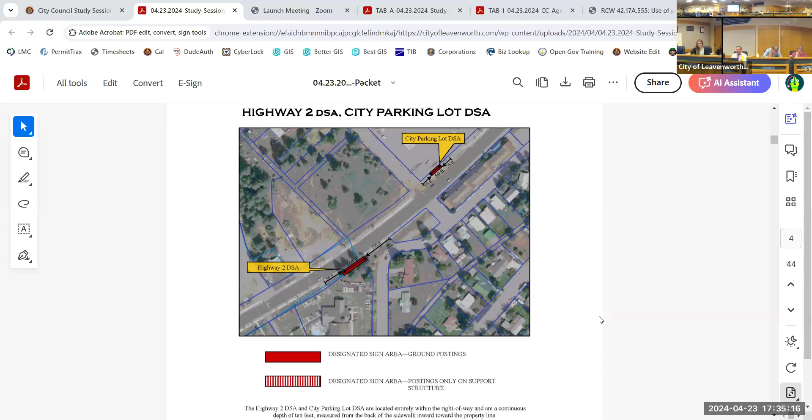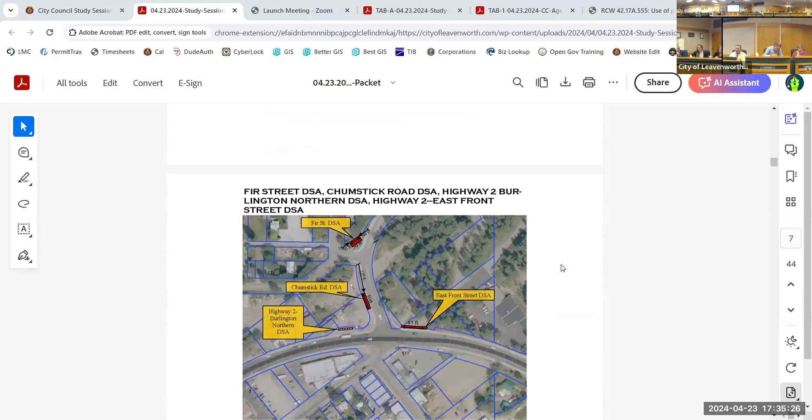Council asked staff to review alternate designated sign areas along Highway 2 where political election signs and other signs defined in the DSA portion of the code could be placed. So in your packet, you have the existing DSA section of the code, as well as some suggested areas and locations that could be created as designated sign areas. I'm going to go through this presentation, but then our city attorney is going to share some new information that I was not privy to before I prepared this.

So what we did was staff looked at areas around town that were city-owned property, but outside the DOT right of way. We also looked at some areas in the residential districts that might be appropriate for designated sign areas. They are all listed in your packet, and I'll show them on the screen here. Andrea is actually the one who volunteered to go out and take the photographs.

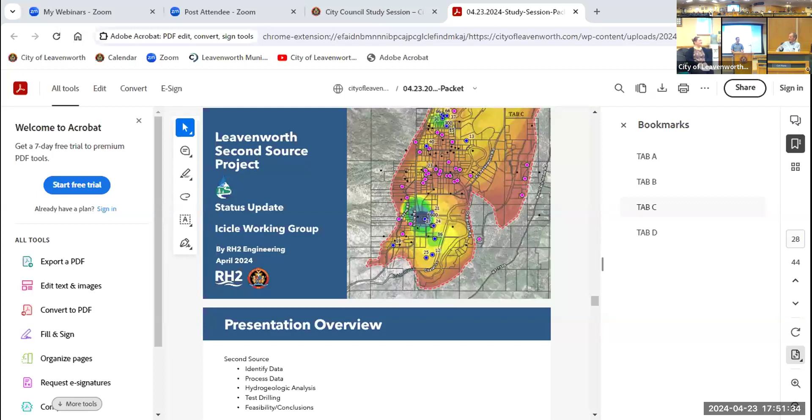I'm working on it. Who should I ask to go to the next one? Okay, you don't have a clicker. I don't have a clicker. Can I see there, like- click. Oh yeah, we need a PowerPoint for that, if you have it. It's okay, yeah, I should have prepared that. That's okay, so I can just scroll. I'm sorry, what? You can't make it the big screen. Okay, oh, I can do Control, full size, yeah. Okay, there you go.

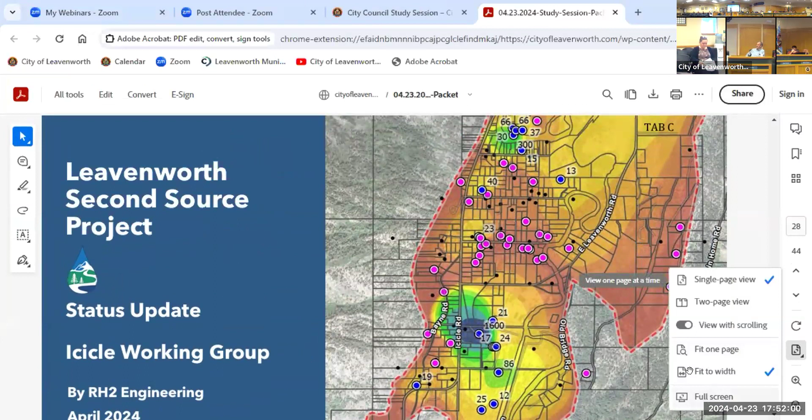So, yeah, introduction, you want to go there? So the whole project, the way we outlined how to approach this task, really the vast majority of the time and energy was spent just finding and processing data.

So there are some reasonably decent hydrogeologic studies in the valley here. The city has had a few done on its existing wells, well field, the hatchery and USBR, there's that work. Really complex, about that hatchery area.

In order to augment those two main study areas, we looked at the Department of Ecology, which maintains a database of all wells through the state, theoretically going back to when wells first became a thing, and keeps track of certain attributes associated with that. But it's typically the drillers who fill out that documentation and file it with the state. That's where the art of well log interpretation comes in.

So the idea was trying to sort through, I think there were about 500-ish well logs in the Leavenworth Valley.

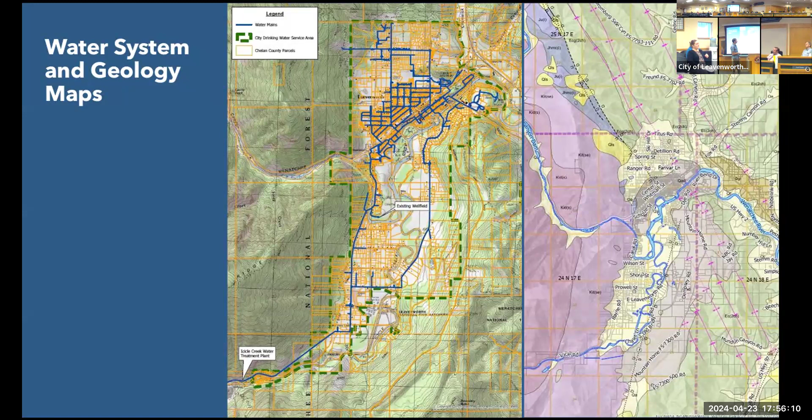So we did spend some time trying to accurately locate those and really put preferential modeling on this. On the red ones, if we felt like we could accurately locate the parcel, the blue ones we could not — a little bit less data quality there.

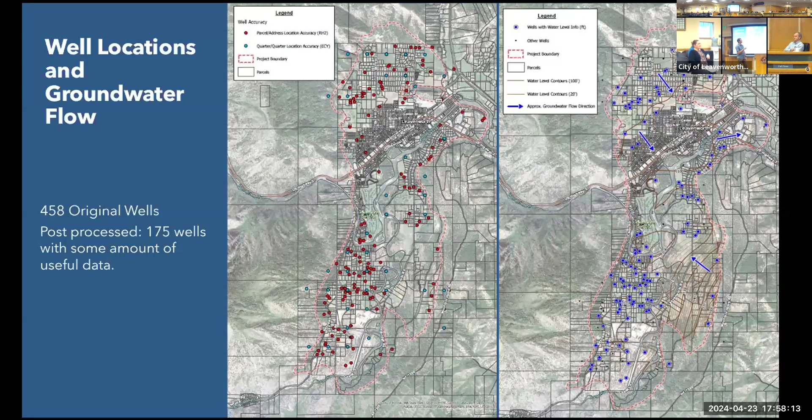Probably not going to be the case for anything on Ski Hill, but really from town up north. Most of the groundwater flow is down towards town, so it's being recharged from precipitation that occurs up on Tumwater Mountain. Probably not the same body of groundwater. So we really kind of shied away from looking up here, even if maybe down here in town you could make some argument, or you could maybe argue that if you just viewed it as Boulder Basin, you're in the same body. It worked out nicely, but we weren't taking it.

So Adam, you're saying that where it's thick, that's not the aquifer, that's the formation of the rock that's thick? So depth of bedrock.

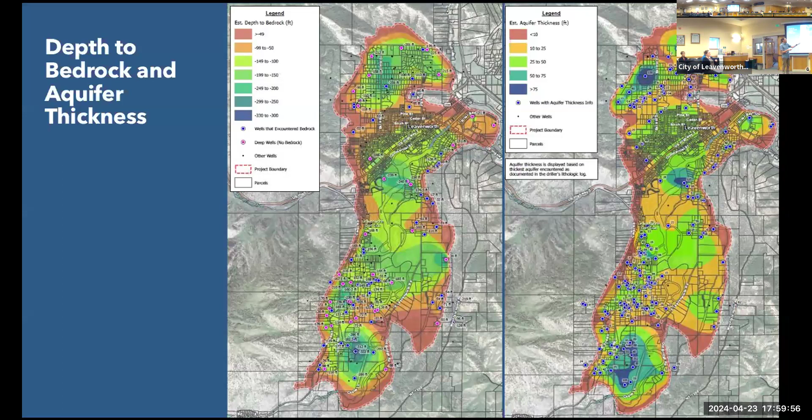So this would be how deep to bedrock. Some of that material is going to be silts and clays — can't pull much water, any water, out of silts and clays. But it does give you oftentimes the most pumping capacity, because your hydraulic grade — the deeper you can put your pump, the more drawdown you can have theoretically. With all other things being the same, you can have more capacity. So it's still an important thing to look at, but it's not as critical as your aquifer thickness, or as the next slide gets to, how wells actually pump.

So this is just how much the drillers report well capacity. You guys are a hot spot, the hatchery is a hot spot, there's not a whole lot outside of that.

Another way to look at capacity, because if we're trying to remove variability of well size and construction details, we switch to a different metric called specific capacity, which looks at your withdrawal per drawdown, per foot of drawdown. You can imagine the harder you're withdrawing out of a well, if the aquifer is not very productive, you're going to get a pretty steep depression in the well and drawdown. It really takes a lot of head differential to induce the flow at the bottom of your well.

Again, hotspot being your well field and the hatchery well field, and a pretty decent one, like where you're at East Leavenworth.

So we did identify, based on all of that hydrogeologic mapping, some key areas over here on the right. We looked at the golf course, broke it up into 3 different areas: Enchantment Park, and the Wicko property over here.

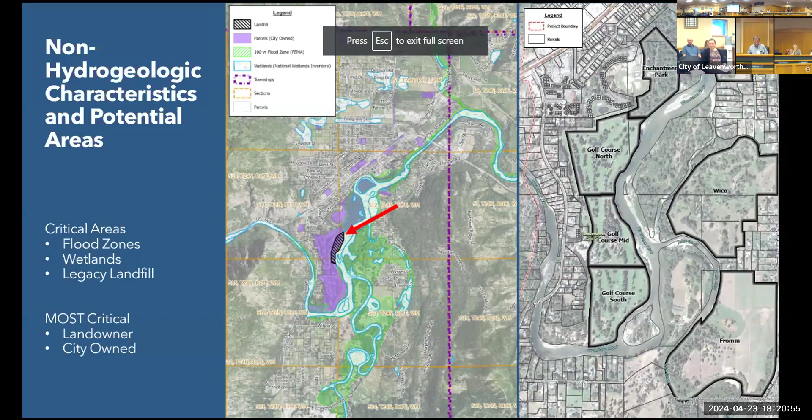All right, last item here is the noise ordinance and nuisance noise discussion. Thank you, Mayor. A couple council members brought up issues related to noise and asked for us to add this as a study session item, which we have done. The things I recall hearing from council members was concerns over early start for construction projects on a holiday, and the issue of nuisance noise.

Right now, when we look at our code, we measure noise based on decibels. I pulled together all the sections of our code that reference noise and provided them in your packet, and invited our attorney, Nikki Thompson, who's with us tonight, to lead this conversation about any potential changes we may or may not want to make to our existing noise ordinances.

So again, I think that this is an opportunity for Q&A more than for me to present. I think Sylvie accurately described the two types of noise ordinances that we usually see. The first is based on state noise control laws, and the second is more of the public disturbance noise.

The public disturbance noise ordinances tend to be more subjective and therefore a bit riskier. The decibel-based codes tend to have more objective standards that we can clearly and readily identify. Your main ordinance is in fact a decibel-based ordinance, which mirrors the WACs, and identifies zones where different decibel levels are allowed.

You need time, space, and money to do any kind of exhibit. We can maybe find the money, we have the time, but we don't have the space. So this is a great opportunity for us, and it's a great opportunity for the Grange. The overview is that the Grange is aging out, so they're in danger of disappearing, just like a lot of other service groups. They're no different in that respect. If they do age out and become a non-functioning Grange, then there's an issue with that facility, that building.

That building has been there since 1930, since they moved it off the train tracks, because that is the old Great Northern Railway Station, built in 1910. It will revert to the state Grange. The state Grange would then in turn sell it, because they wouldn't use it as a Grange anymore. So it'll just go back into public or private use. And that's a loss for the city and the residents, we feel.

Because there are a lot of great opportunities with this for other expanded programs. I'm not going to go into that, that's for another meeting presentation. It's a valuable asset that we're trying to retain. So we're working on a lease with the Grange. It's going to be a lease in perpetuity, where we're there, we hope, for the duration of our lifetimes.

And they've been amenable to it. They see it as an asset to the community also, something that they can benefit from. The Grange would continue, we would make sure that continued as an organization and will be a service to the community going forward. The Greater Leavenworth Historical Society supporters want to support the Grange, so we'd have two organizations.

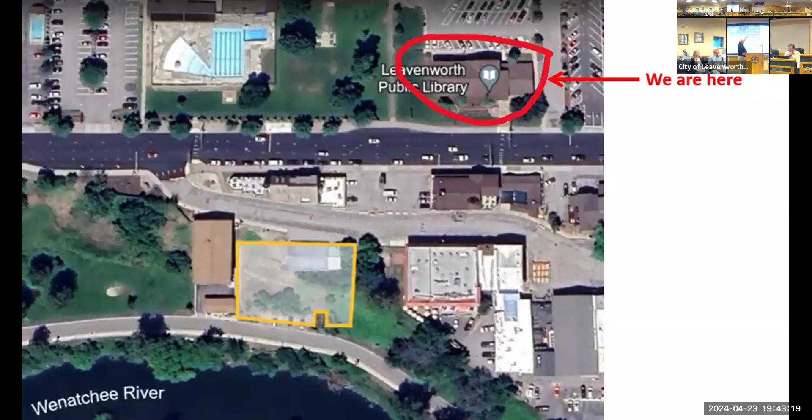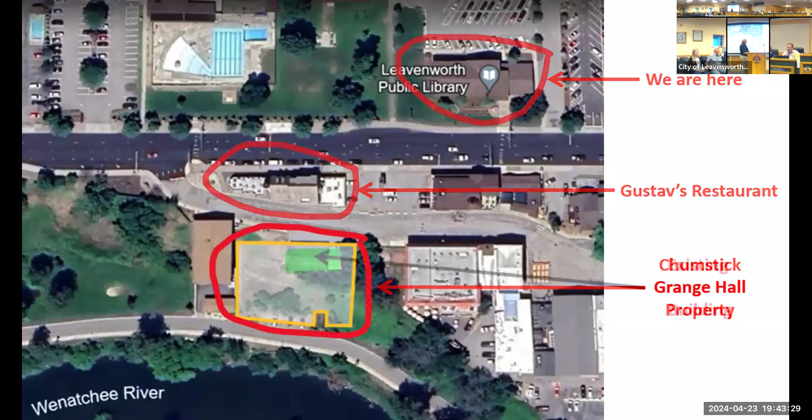If you don't know where the Grange is, I brought this in case. Mike Steele and Keith Gaynor didn't know where it was, but hopefully we know where it is. We're here, right here, where the public library is. There's the Gustavs, and right across the street is where the Chumstick Grange Hall property is. Just to give you that familiarity if you don't know. The existing Grange Hall is this shaded area right here, the green area.

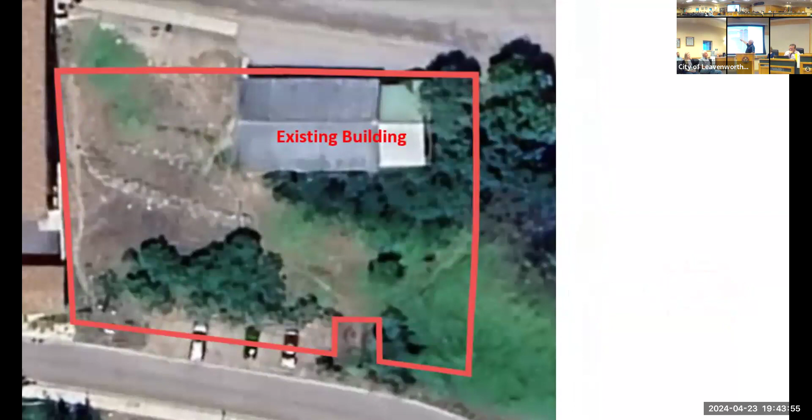Focusing on that, this is their actual property magnified, so you can see the existing Grange is... sorry, that's here. With the existing Grange building right here, this is the train station, the larger structure there, that's the actual passenger building, and then it had an add-on. It's a two-story building on a steep slope.

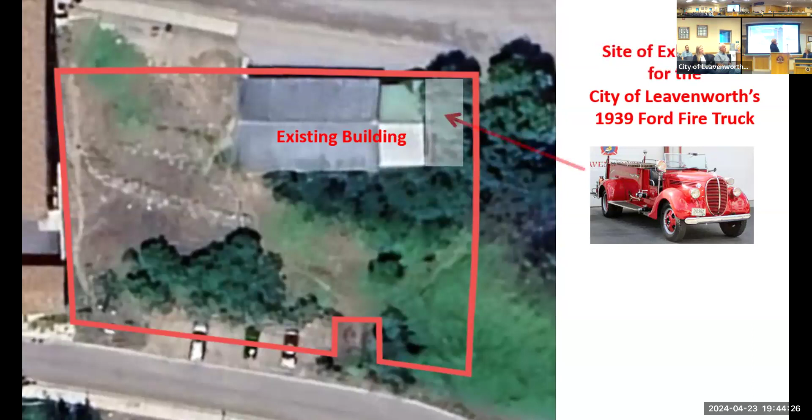One of the things that is of interest, I think, to the city, certainly to the fire department, is there is the city of Leavenworth 1939 Ford fire truck, and we want to find a place for that. We do have a place figured out here. There's going to be a site for an exhibit hall to be placed right next to the Grange building. They've got 32 feet on that side of the building that they can build on. They've also got a site that we want to have as a site for an outdoor theater.

I won't even go into all the benefits there, I'll tell you what we got planned. It's gonna be big, but this is not to scale or anything, that's just to give you an idea, but there's a slope there. It's not usable for anything else, but if you put some pilings down there and engineer it right, you could have it as a theater, or a small outdoor theater for programs and other shows. So we're looking forward to that - a little community asset.

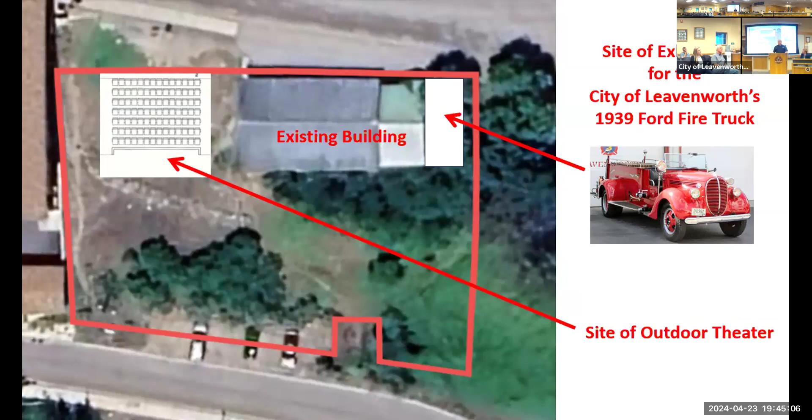So far, as I've said in other prior grant applications with the city, we did get a grant from the Chelan Douglas Regional Port Authority, $6,500 for feasibility. The problem with that building structure is that if you looked at it, you'd say, I don't know if that thing is worth renovating. That was a concern - is it worth it, is it possible to renovate it, and also the slope that it's on, is it geotechnically sound? So we were fortunate enough to get a grant covering almost 95% of the monies needed for the feasibility studies.

Looking right in front of me here, I do like this, I can't leave it out - it's a quote from Syndicate Smith. Todd Smith said, as his conclusion in reading through this very lengthy geotechnical study, that it doesn't appear there are any considerations in this report that are detrimental to the continued use and or future use of the building. Because I asked him, so what does it really say, and that's what he said. So I was happy about that. There's always ways you can improve any building for slippage of soil, whatever, but he said it's been there for almost 100 years and it's not going anywhere unless you change the conditions of the soil.

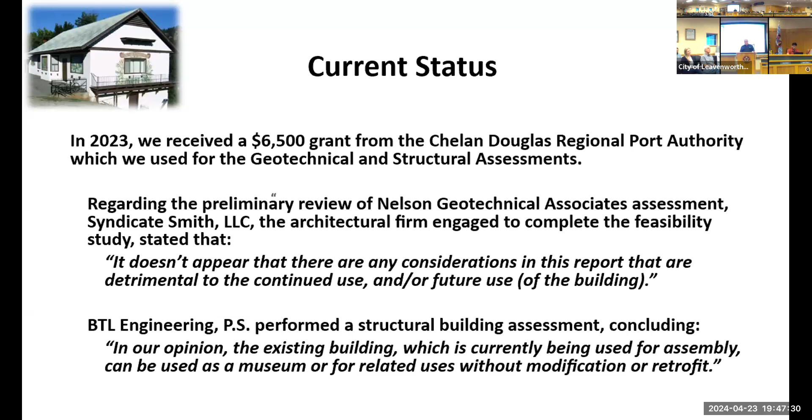I'm not even going into all the uses because there's so many. Moving along here, future plans.

We just recently submitted a $7,000 grant application. We feel pretty positive about getting some funds from that. We know the source of the funding has monies to grant, and we think we'll get a positive outcome from that.

Today, we just received $1,000 in donations towards the feasibility study. If we get the $7,000 or thereabouts, we need an additional $4,500 to complete the feasibility study. The feasibility study portion isn't just the structural and geotechnical assessment—it has to address anything regarding city code, everything else has to be done. That's going to be through Syndicate Smith, and Bob Smith's going to do that work for us. So we're working with them on that.

Last month, we were fortunate that a professional grant writer retired in this community. He did grant work for the Puyallup tribe, writing grants for their museums, and he's going to go back to those same sources he got funding from. This November he's going to be doing some major applications for grants to get some of the monies we'll need.